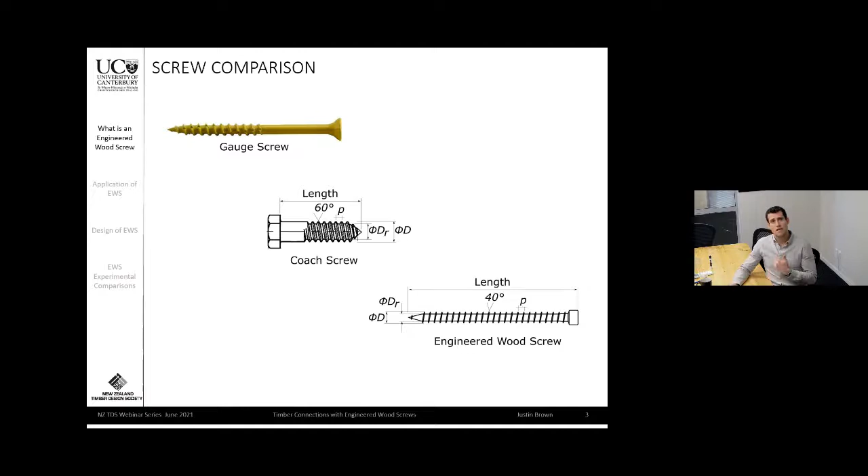All of these screws have common terminology, and that's what I'd like to start with so we all understand certain components as I go through the presentation today. First of all, starting at the top, we have the screw head, which is where we attach the driver to turn the screw into the timber.

If we look at this partially threaded screw, we have the screw shank, which is the smooth section of the screw. Followed by that shank, we have the shank cutter, which is specifically designed to drill a hole slightly larger than the shank and help reduce the installation torques required to drive these long screws into timber members.

Both screws, fully threaded or partially threaded, will have its core or root diameter, shown as D subscript R in this image on the right. Followed by that, we have the threads of the screw, which is generally how we define the size of the screw as the outer diameter D.

The distance between the screw threads is called the pitch. And then finally, at the bottom of the screw, we have the self-tapping tip, which is why these products are also referred to as self-tapping screws.

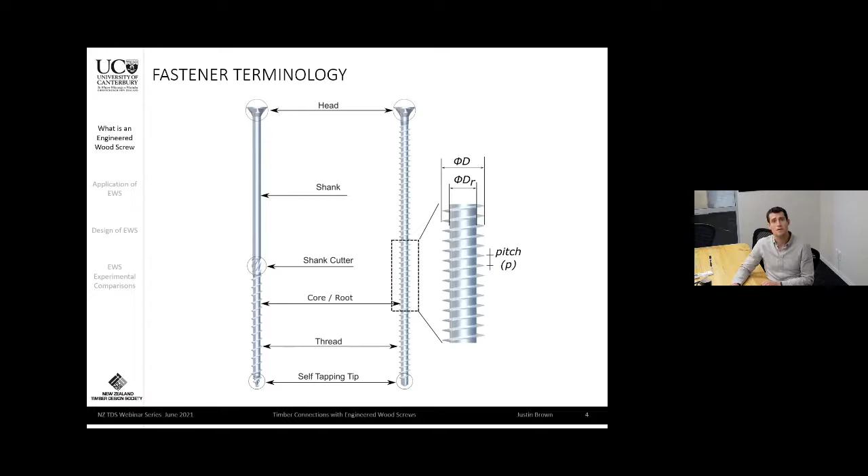These terms I'll use throughout the presentation today. First, gauge screws - these are the screws found in our 3603 design standard, generally referred to as size from 4G to 14 gauge in size. These are 2.7 millimeters in diameter to 6.3 millimeters in diameter.

They come in a variety of forms that can be used for different applications, such as decking screws, for example. They also have many different coatings on them to allow for application in different environments. Some screws also have a T17 tip, which refers to the cutting tip to allow for further ease of installation.

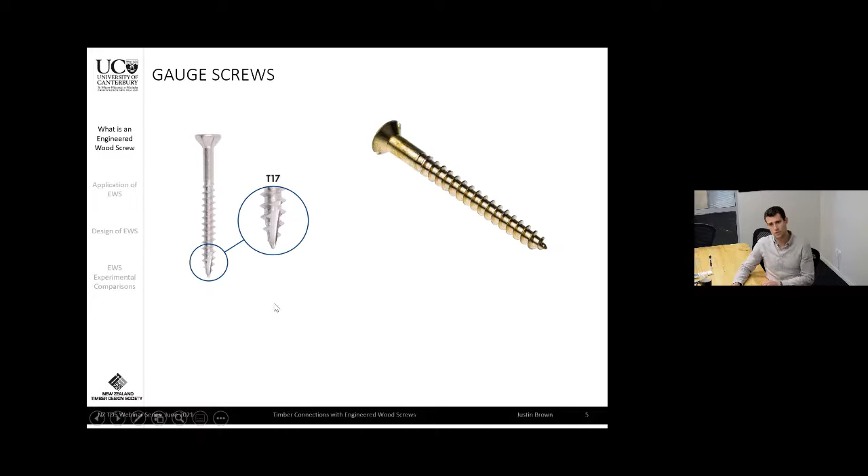For the next few minutes, I'd like to compare a coach screw to an engineered wood screw, going through all the different components of a screw that I just mentioned. Starting at the top, we have the head. A coach screw is generally a hexagonal head, whereas an engineered wood screw has many different head types, which gives you some flexibility in design.

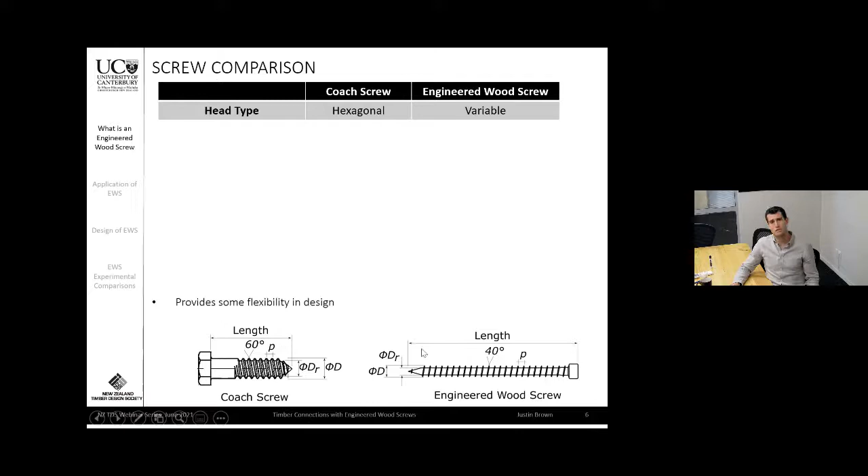The outer diameter of coach screws is in the range of 6 to 20 millimeters, whereas an engineered wood screw is smaller, in the range of 2.5 to 14 millimeters. So there is a difference in size in this.

The root diameter of a coach screw is slightly larger as a ratio of the outer diameter than an engineered wood screw. This means that an engineered wood screw has more thread area in contact with the timber, which helps with its withdrawal capacity, which I will discuss next.

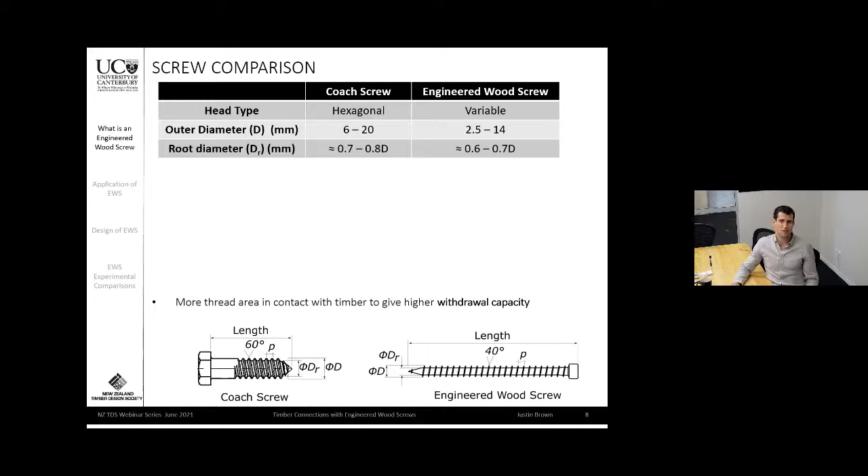The screw length is up to approximately 200 millimeters for coach screws, whereas an engineered wood screw can have a length up to 1.5 meters - very long compared to a coach screw, which allows you to connect much larger engineered timber members together.

The thread length of a coach screw, depending on the size, will become partially threaded and usually 60% of the length. Whereas for an engineered wood screw, as I showed in the previous image, it can be partially or fully threaded, which is also used for different applications.

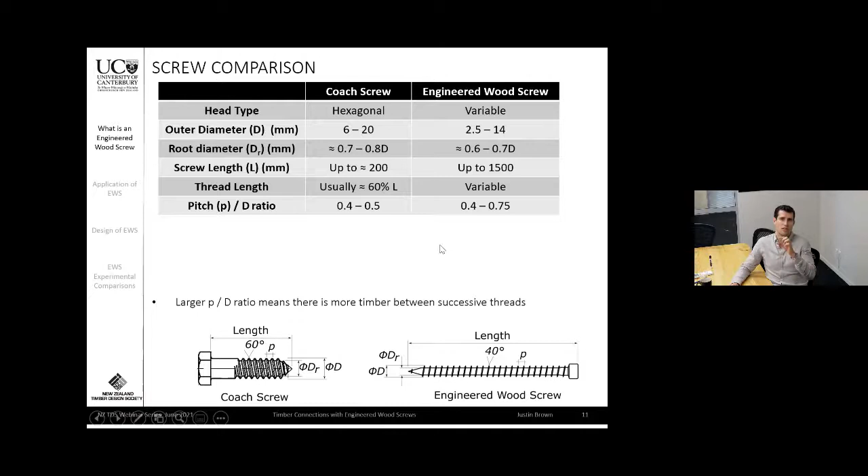When we look at the pitch to diameter ratio, this is slightly larger for an engineered wood screw, meaning there is more timber between each thread, which again helps with the overall withdrawal capacity. On that similar note, the thread angle is much steeper on an engineered wood screw, generally 40 degrees, meaning there will be less local timber damage on installation, again helping with the capacity.

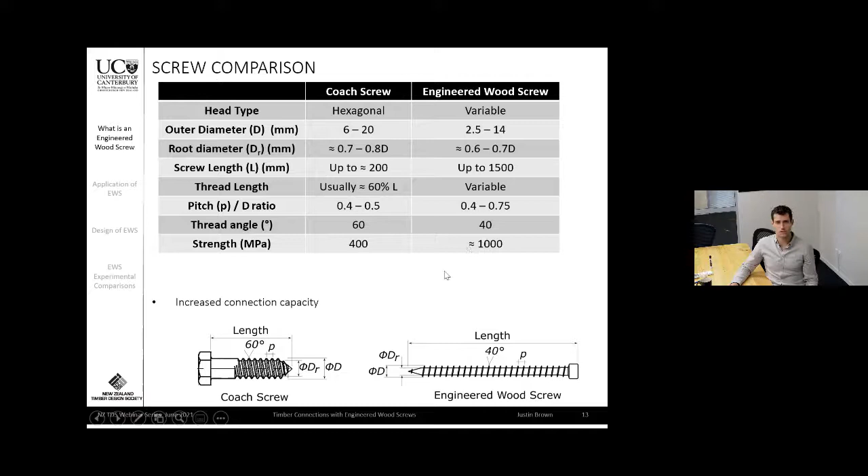And finally, the strength of these screws. Coach screws are generally around 400 MPa, whereas an engineered screw is around 1000 MPa. So a significantly higher steel strength is used in these engineered wood screws, which gives them increased connection capacity.

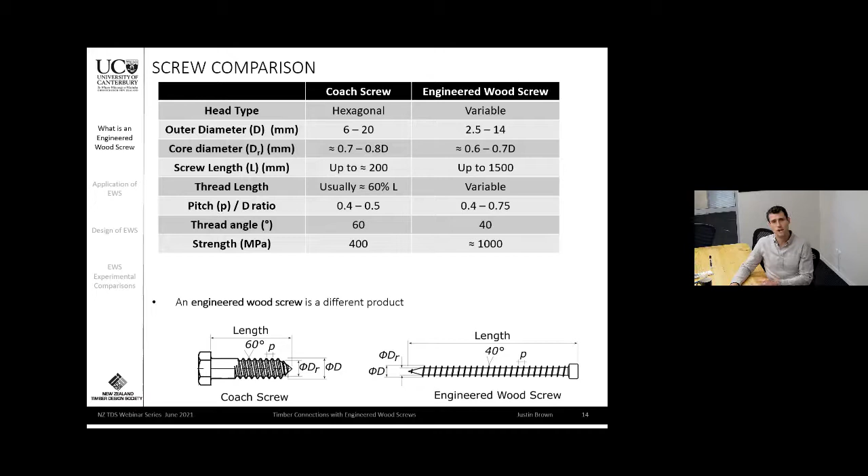In summary, when we compare an engineered wood screw to a coach screw or to a gauge screw, they really are a different product. Gauge screws and coach screws can be used and have a strong application in many of our timber buildings. What I want to focus on today is where we can look at using engineered wood screws, where they are a different product and can provide different advantages.

Here is a visual comparison of what I just described, a coach screw to an engineered wood screw, where you can see looking at the head, to the shank cutter, which will be there for partially threaded engineered wood screws, to the thread, and finally the screw tip. They are really a different product, specifically engineered for different reasons.

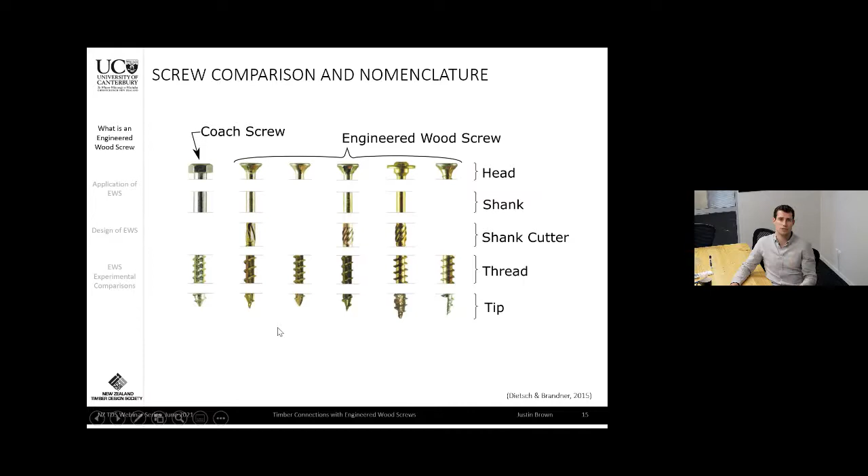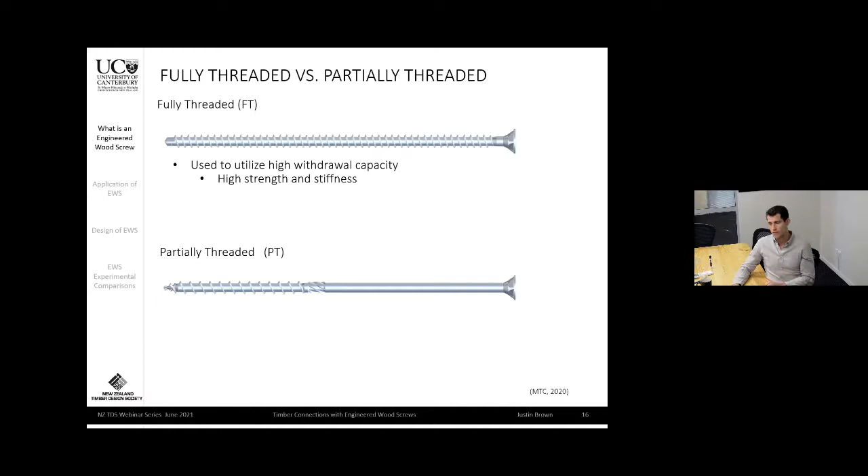Now focusing on engineered wood screws, which I will do for the remainder of this presentation. As I previously mentioned, they can be broadly placed into two categories, fully threaded or partially threaded. Fully threaded screws are used to generate the withdrawal capacity along the axis of the screw, and these can also provide a very high strength and stiff connection.

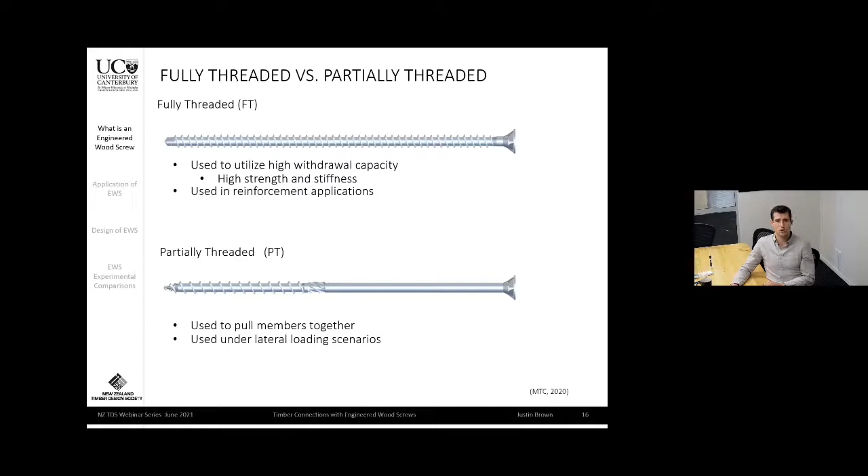They're also used in reinforcement applications very commonly. A partially threaded screw, on the other hand, is generally used to pull members together, and they're used in scenarios where the screw is under lateral loading and not under axial loading.

Focusing on the screw head types, there are many screw head types. I'll just focus on the three main ones that you'll find with engineered wood screws. We have countersunk head, which can provide a flush surface finish to either steel or wood, and these are used in steel to wood or wood to wood connections. We also have a washer head screw, which is used to provide a high clamping action. The head of the screw is really like a large washer that can then clamp two pieces of steel to wood or wood to wood together. So the washer head screw head diameter is significantly larger than a countersunk head screw.

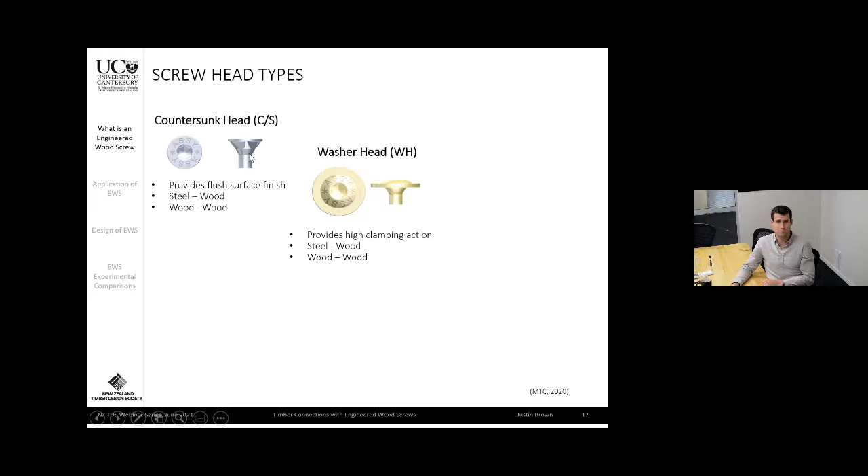The smallest screw head diameter that you will be able to get is a cylinder head screw. These are specifically made as small as possible to just fit the driver that you will use to turn it into the wood, so that we can actually bury the head of the screw into the wood. These types of screw heads are used in applications for wood-to-wood connections.

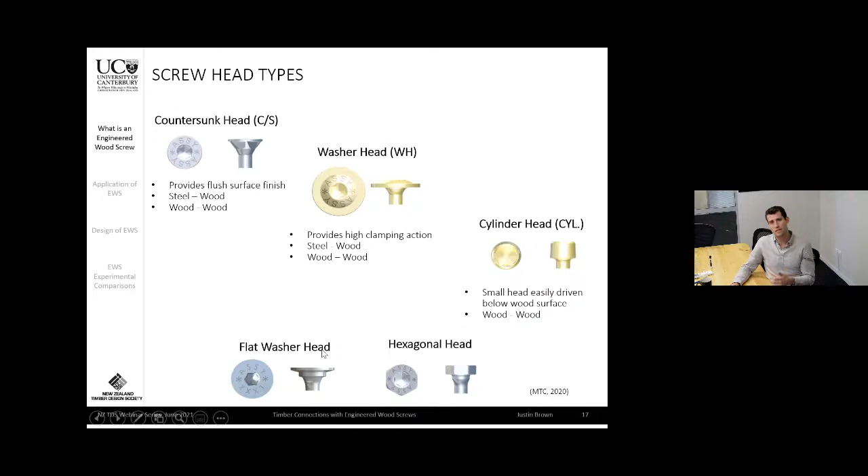As I previously mentioned, there really are many different screw head types that are now becoming available. Different suppliers have their own unique head finishes to help provide different architectural looks as desired.

Looking at the bottom of the screw, there are also many different screw tip types that you'll find if you're looking at different suppliers. They're all generally done to provide ease of installation. They also are meant to provide a self-tapping function, to say that they do not require pre-drilling. However, in New Zealand species, which are generally our radiata pine or Douglas fir, of much higher density than, let's say, European softwoods, self-tapping may not always work and pre-drilling may be required. I'll speak about this a little bit later in the presentation.

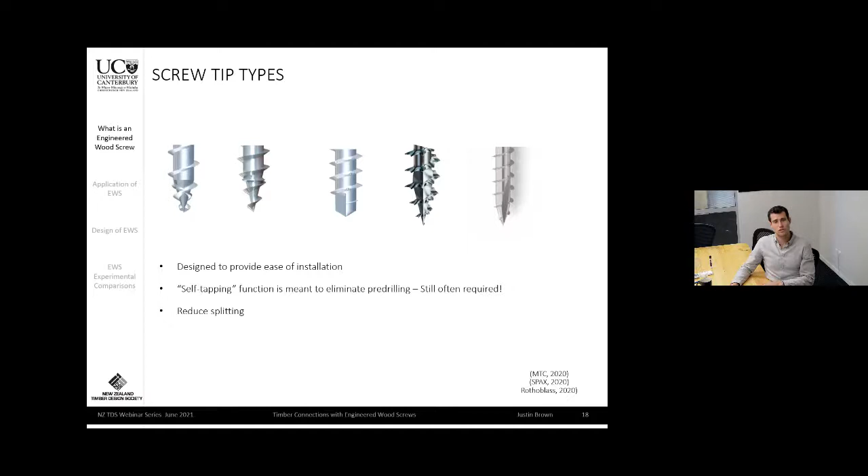The tip is also designed to reduce splitting on insertion into the timber, and it's also designed to reduce the installation torques. You can imagine some of these engineered wood screws are up to 1.5 meters long. That frictional area becomes quite large as it's going into the timber, which can make it quite difficult to actually drive in. The tip can also influence the withdrawal capacity of a fastener, and for this I recommend you look at the specific supplier documents, which I will get into that later on in the design.

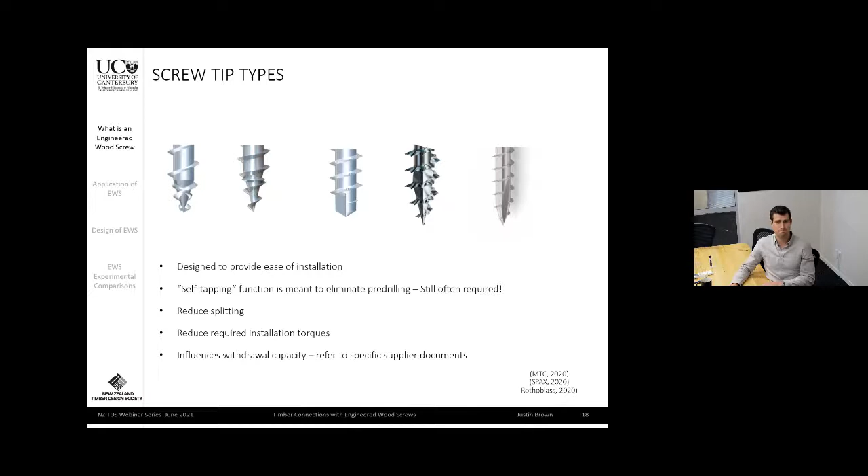So now I'd like to spend a few minutes just to give you a general overview of how we can apply these screws in typical connections in a timber building. First of all, as a reinforcing element, this is a very common way to use engineered wood screws. This was also our first webinar series given by Daniel Moroder, so I'll just quickly overview this section.

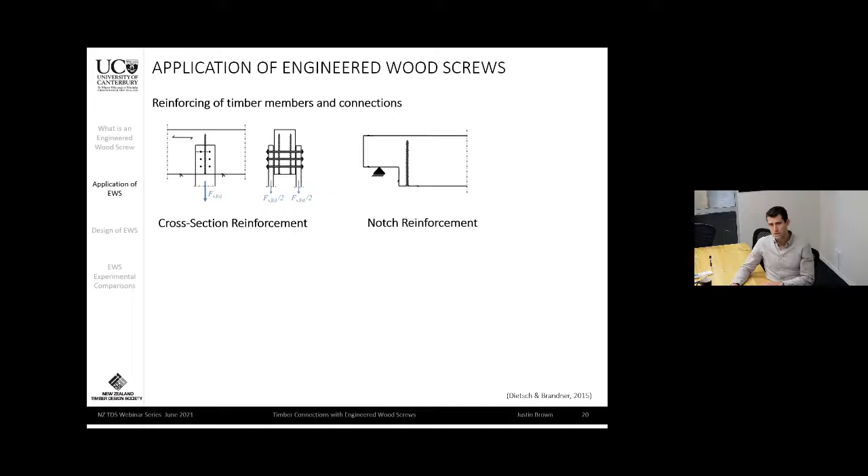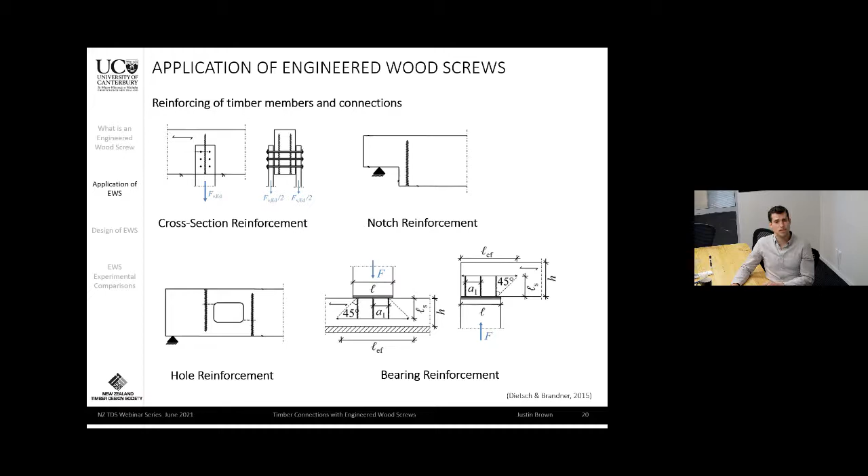Engineered wood screws can be used to provide cross-section reinforcement to prevent tension perpendicular to grain splitting. They can provide notch reinforcement, as shown here, hole reinforcement, and also bearing reinforcement. In all of these applications, you can see that we are using a fully threaded screw and even most generally a cylinder head. They can also reinforce connections to prevent splitting along a dowel group line, and they can also provide shear reinforcement to actually increase the net shear capacity of a section.

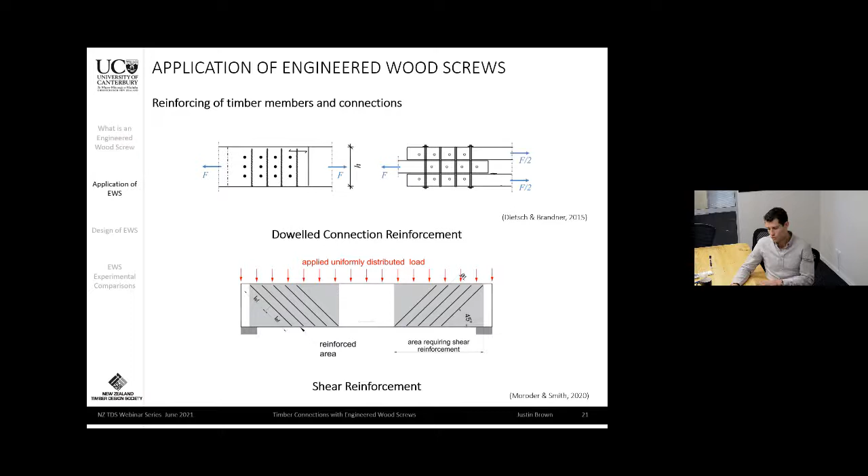For more information on this topic, I'd recommend that you look at the NZ Wood Design Guide that has been recently published, authored by Daniel Moroder and Tobias Smith at PTL Structural Consultants. You can also refer to our first webinar, as I previously mentioned.

Now, how can we use these engineered wood screws in connections?

Floor-to-floor details are a very common way to employ these screws. Before I get into more of these images, I'd like to mention that the arrows indicate the direction of loading. If we look at X's, crosshairs, and dots, those represent load into and out of the page, and our arrows represent loads across the page.

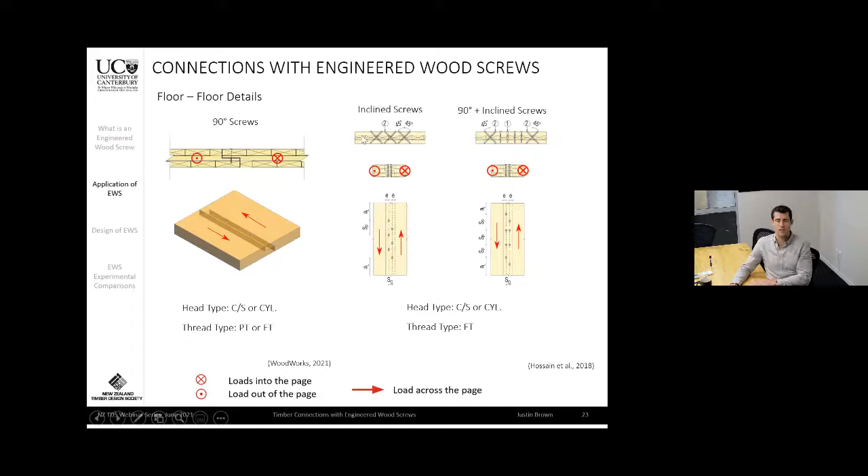A common methodology is to install screws at 90 degrees at a lap joint, here shown with CLT, to provide an efficient shear transfer method. However, we could also use incline screws for this same connection, which can provide increased strength and stiffness where desired. We may also combine 90-degree screws and incline screws for the exact same joint, to provide increased displacement capacity, especially under seismic loading.

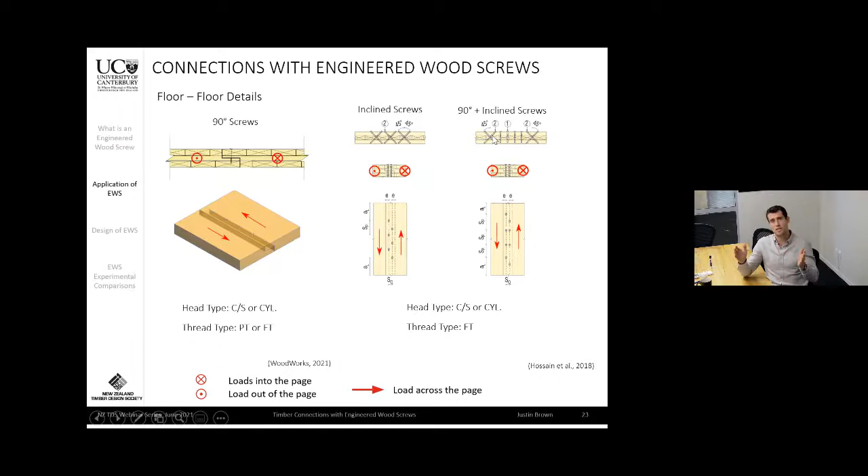We may use these screws in floor-to-beam details to provide shear transfer into and out of the page, or in a wind uplift scenario where we need to clamp the panel to the beam below. If we are looking to clamp those together, we might use a washer head screw to support the CLT, with the threads inserted into the glulam beam below.

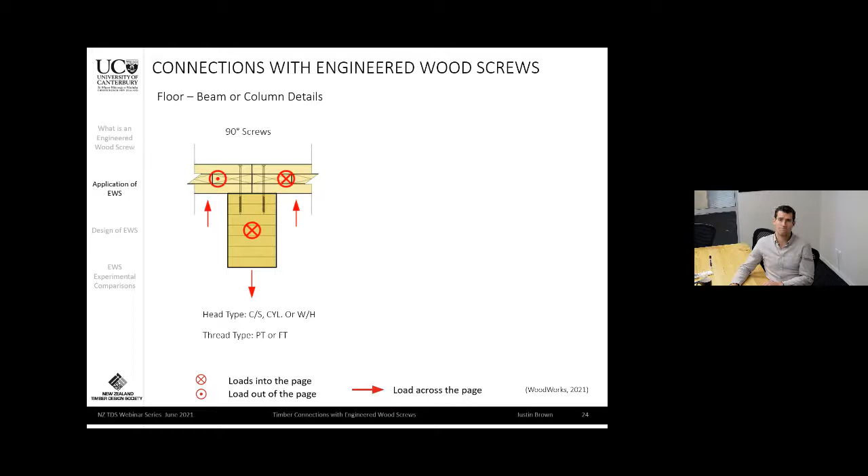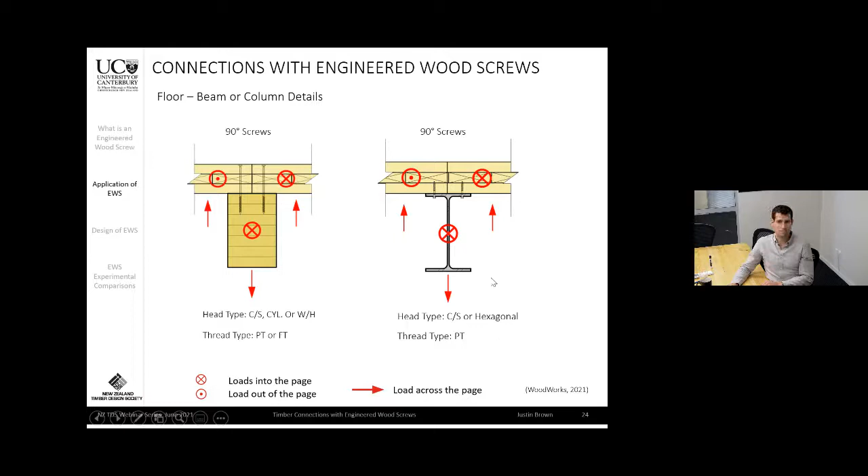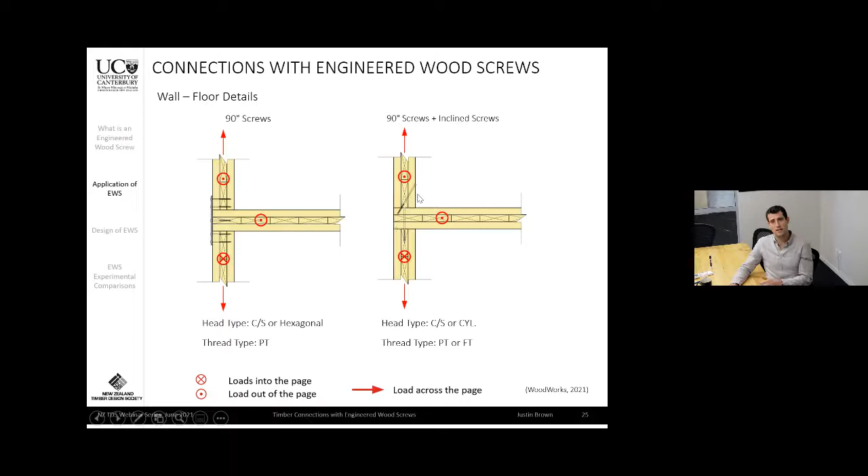We may not want that steel plate on the end, and if that's the case, we could also use incline screws to achieve the same connection and resolve this detail in a different manner. In this case, we may use partially threaded or fully threaded screws to provide a sufficient connection from the wall to the floor below.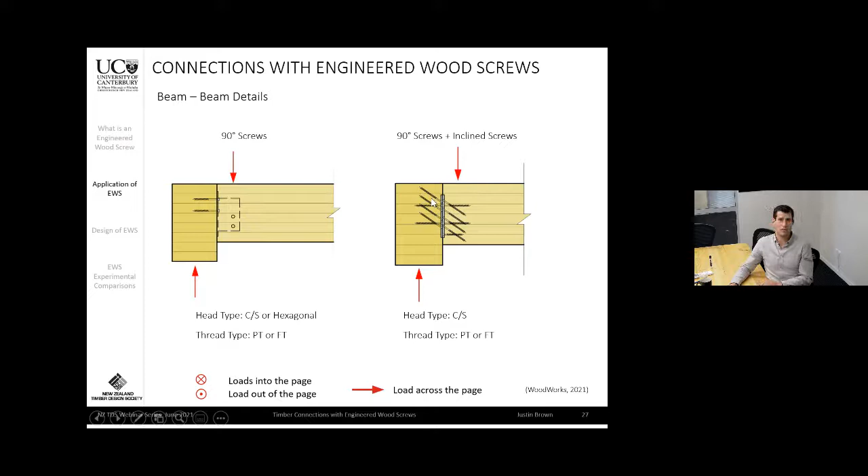I hope that gave you a quick snapshot of where you could use these screws on your next timber project. Now I'd like to actually discuss how we could design those screws.

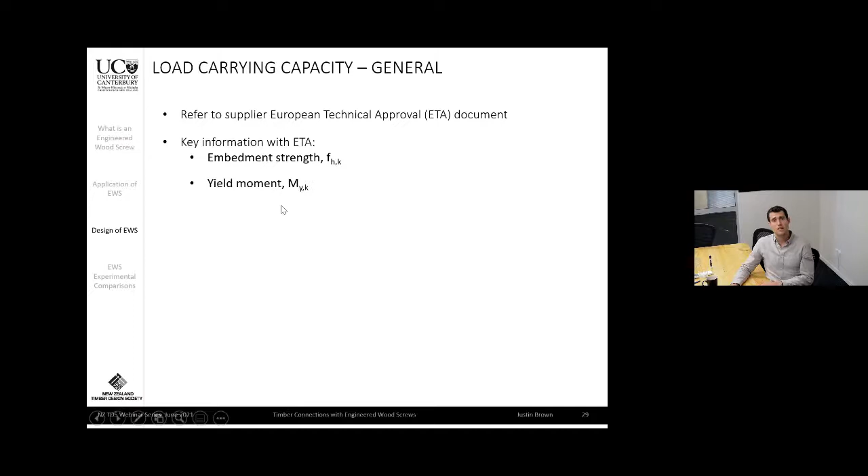To design these screws, currently they are not listed in the NZS 3603, so at the moment you will be required to refer to the specific supplier's European Technical Approval document. These documents are available through supplier websites, freely available, and contain lots of information on the design of their product. Within the ETA, you will find the embedment strength, the yield moment, the withdrawal parameter, the head pull-through parameter, and the tensile capacity of the screw.

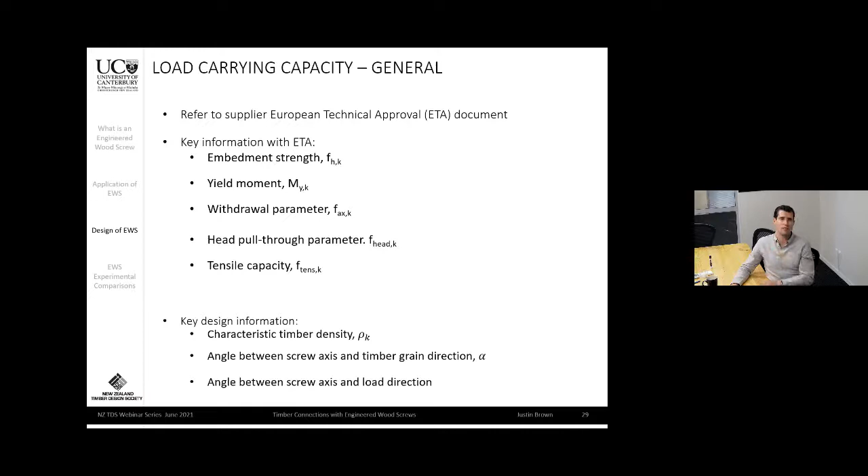As a designer, you will have to understand the timber density you are dealing with. For radiata pine in New Zealand, that can often be 440 kilograms per cubic meter. We also need to understand the angle between the screw axis and the timber grain direction, and the angle between the screw axis and the direction of the load. Now I'll take a minute to describe these five key components found in the European Technical Approval.

First, the embedment strength. Embedment strength is really a bearing pressure of the screw, or a dowel, as a reaction force against the timber. This bearing pressure acts perpendicular to the axis of the screw.

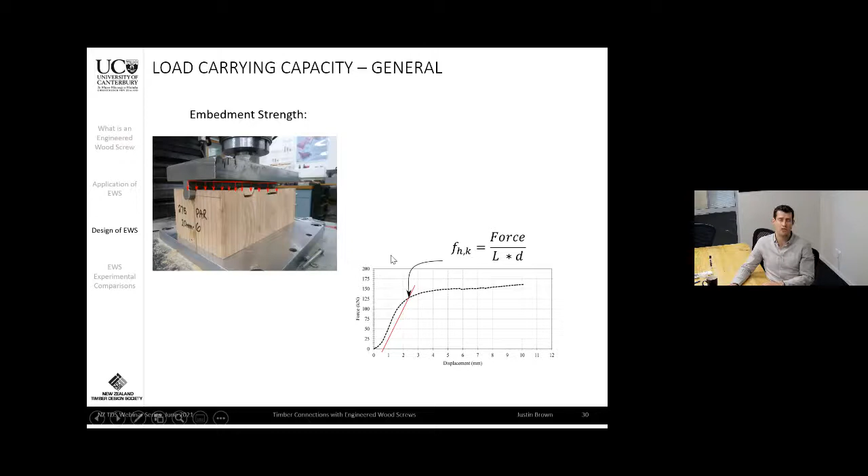In this photo, I'm showing some testing we did at the university with a smooth dowel being pushed into a CLT piece of wood. Here we can see the representative load displacement curve, and embedment strength is determined by offsetting the elastic portion of the curve with this red line and determining the point of intersection. We then take that force and divide it by the length of the screw and the diameter of the screw, which gives you your embedment strength, a property for design.

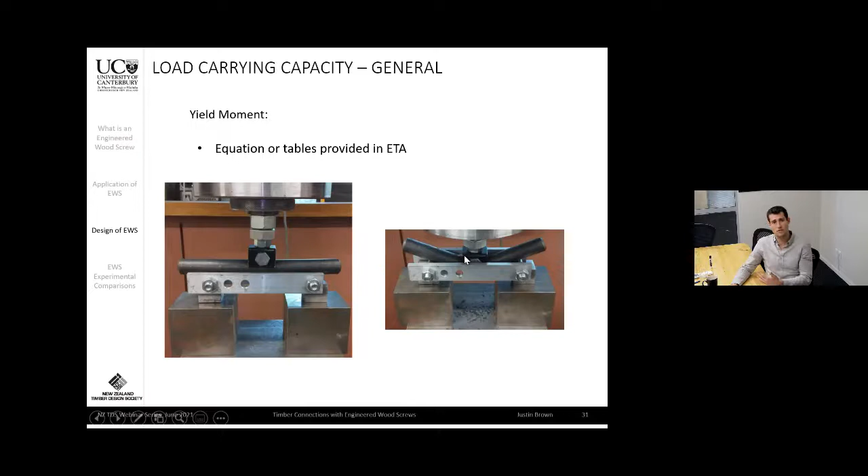The next value is the yield moment. That is generally given as an equation or tabular value in the ETA. Here I again show some testing from the university where we are determining the yield moment of a smooth dowel. So it's literally a function of the steel property, which gives us this yield moment.

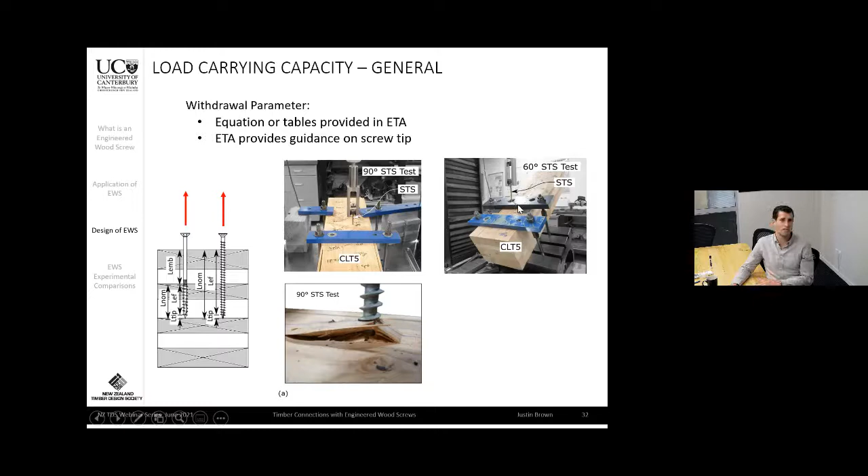In these photos on the right, I show some of our experimental testing in the lab, where you can see we pulled screws out of this CLT member installed at 90 degrees to the timber grain. Here you can see the associated failure mode at the timber surface, which is timber splitting. We also installed these screws at 60 degrees to the timber axis, which would have a different associated withdrawal capacity, and finally we installed them parallel to the timber fibers.

Here you can see there's a distinctly different failure mode between this 90-degree test and this parallel to the grain test. This is actually a local conical shear failure, as the timber fibers around the area of the screw thread are actually pulled out of the timber member.

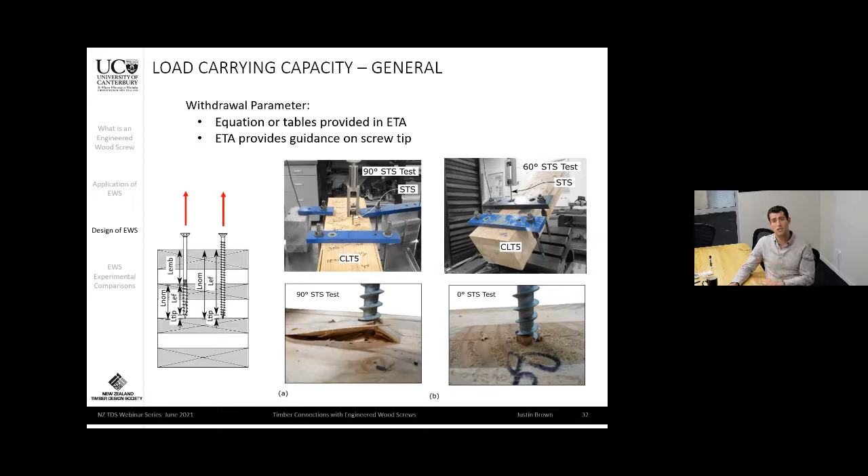Currently, design standards may not allow screws to be installed parallel to the grain, and ETAs provide specific guidance on this if it is allowed. I will say it should be approached with caution, as there are long-term duration effects and moisture considerations, which lead to these conservative strength reduction factors for the screws installed at this angle.

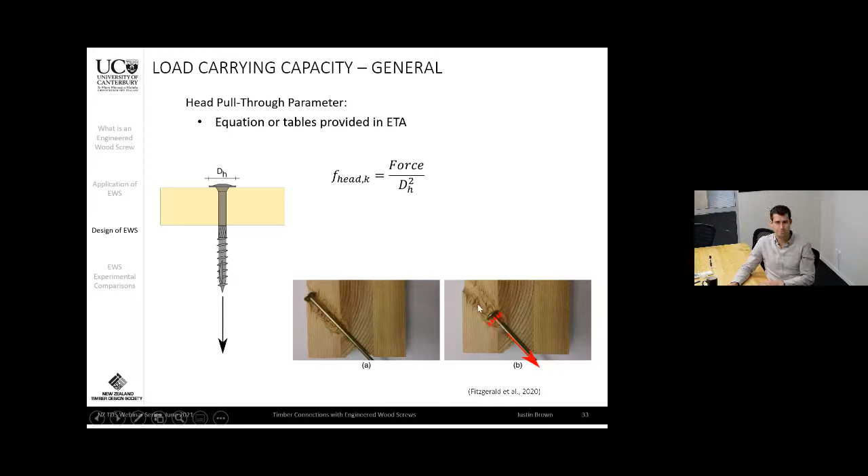Another parameter is the head pull-through parameter. This is generally used in the case of washer head screws, and it's really a function of the surface area underneath the head of the screw. Here in the bottom, I show a photo from work by Fitzgerald et al., where you can see this bearing pressure being developed underneath the surface area of the washer head screw as it's being pulled through the member. So that will generally be a tabular value in your ETA as well.

The final value that you'll look for in the ETA is the tensile capacity of the screw. Here's a testing photo from the lab again, where you can see part of the screw has stayed in the timber. It has snapped right at the surface, and here's the other end shown here in the person's hand. This tensile capacity is generally a tabular value given in the ETA, and it's usually compared against the withdrawal capacity in your design. This will be something I'll discuss more in the upcoming slides.

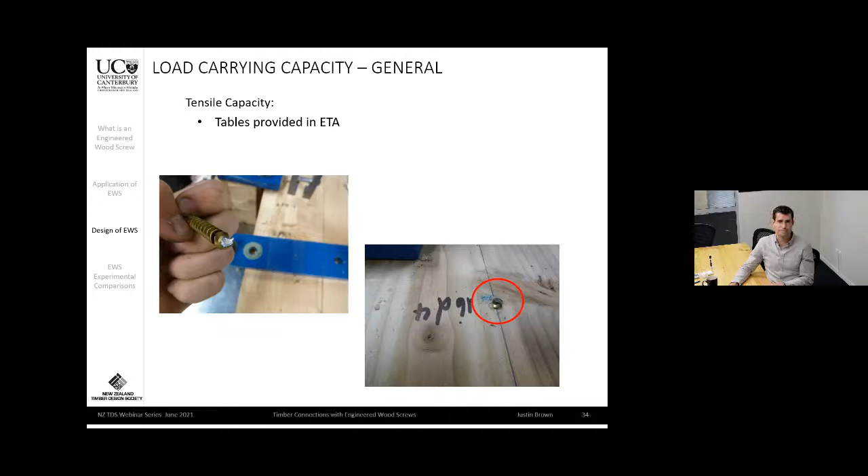Now that we understand the key parameters required for engineered wood screws, I'll look at how we can determine their load carrying capacity, first in shear when they're laterally loaded, and then second when they're loaded in withdrawal.

When we have a screw loaded in shear, there's a certain set of equations we refer to from the ETA to determine the capacity of the connection. Those equations are referred to as the European yield model, or the Johansen equations. I won't get into each equation in significant detail, because this will be a future webinar series from the TDS, so please stay tuned to learn more about this topic. It will be an important presentation in the coming months.

What I will say is that the failure modes are a function primarily of the embedment failure, as I described before, and the yield moment of the fastener. It's also a function of the thickness of the two members that you are connecting together.

Looking at these images, starting at A, we can see that in A and B we are looking at embedment failure, either in member 1 or member 2. The photos here are showing the failed shape of the connection.

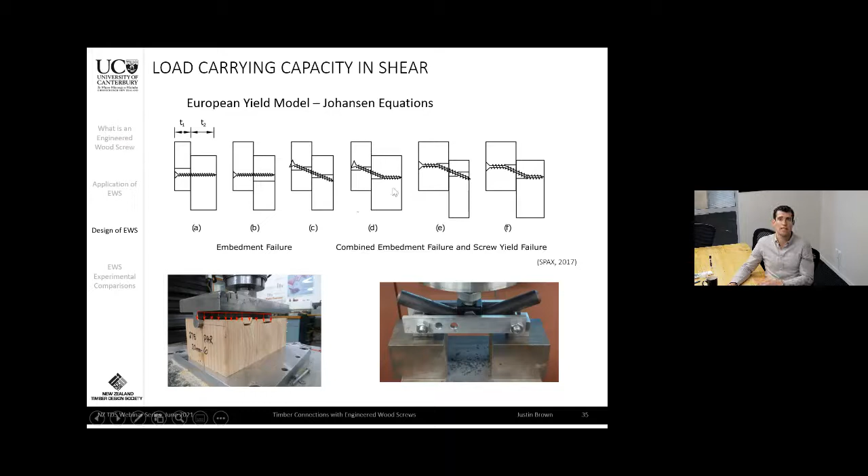That is what these equations allow you to do: determine which failure mode is likely to occur in your connection. We have a set of 6 equations, which I won't get into the details of, but as a designer, we look at the minimum value, and that is then the design strength or load carrying capacity of our connection.

So this portion in blue is really a function of the embedment strength and the yield moment, which I just described in the previous slide. And this section in green is a unique component that we consider for engineered wood screws, which is the rope effect. So now I'll take a moment to describe what the rope effect is.

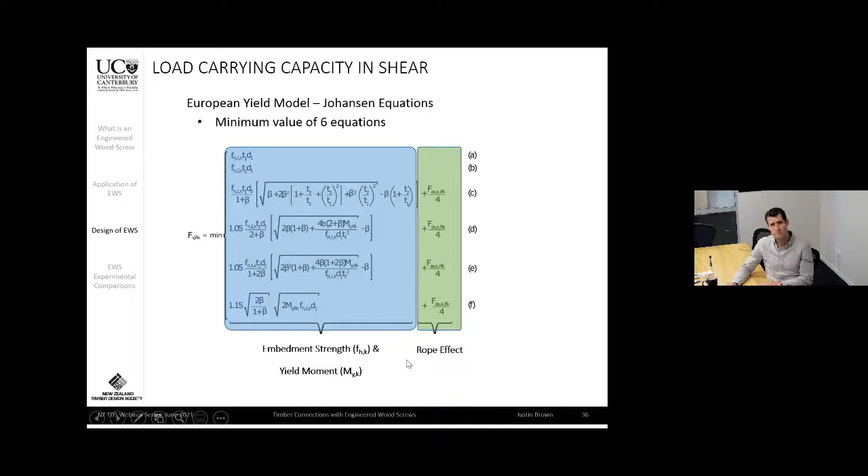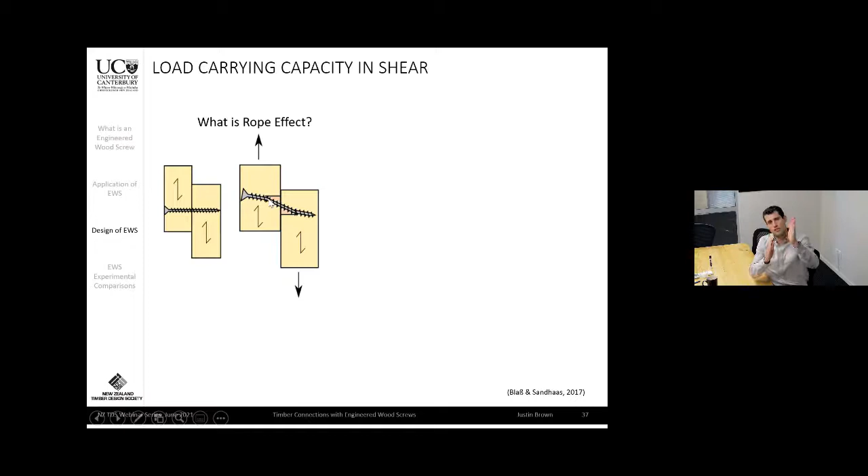If we look at that idealized connection from the previous slides, the rope effect occurs when a connection engages in a small deformation. And as that member is sheared, the screw actually develops a force along its axis, as you can see here in this free body diagram.

That tensile force is developed as the withdrawal capacity of the threads. That tensile force along the angle of the screw can be resolved into a compression component shown in red and a component parallel to the shear plane shown here. That component shown in red is perpendicular to the shear plane and tends to clamp these two members together. That effect is quite significant, and that is what we actually call the rope effect.

From a designer's point of view, we can basically increase the capacity of a shear connection to consider not only the embedment and the yield moment of the fastener, but also the withdrawal capacity, because it is clamping the members together. So that rope effect is usually determined as the minimum of the withdrawal capacity divided by 4, or the shear capacity. This is an important parameter and can effectively double your load carrying capacity in shear if it is present.

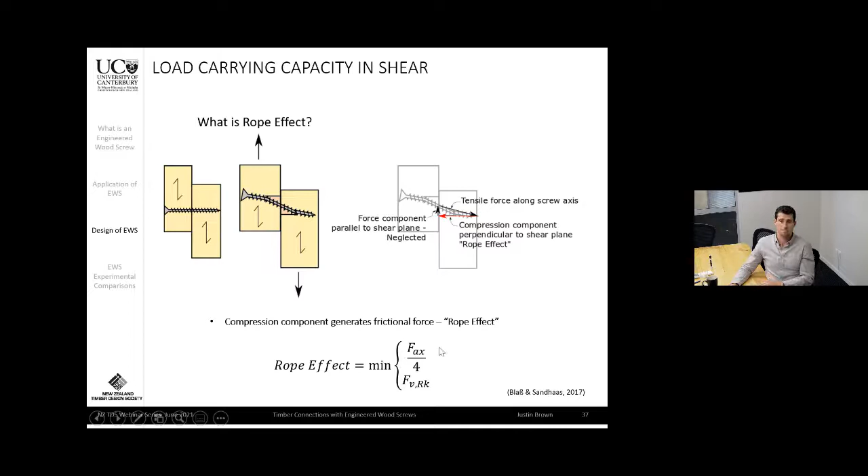Now, looking at the design of engineered wood screws as they're loaded in withdrawal. This is a larger image from our previous slides, where I show the idealized case where a screw is loaded along its axis and pulled out of the timber member in a pure withdrawal scenario.

In this case, to determine the design strength of this connection with a screw, we would choose the minimum of the withdrawal strength, which is a function of the thread, or the tensile strength, which is a function of the steel capacity. The withdrawal strength will be determined by reading that withdrawal parameter from the European technical approval, multiplying it by the diameter of the screw, the effective insertion length, divided by an angle adjustment. And that equation for the angle adjustment will be unique to the ETA as well.

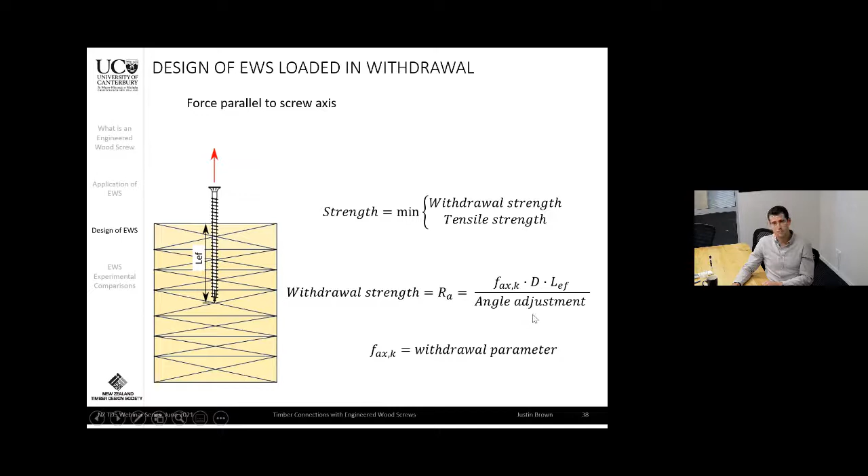However, in most cases, these screws are not perfectly aligned to the direction of the applied load. By that, I mean there is an angle between the screw axis and the direction of the load, which I show here as phi.

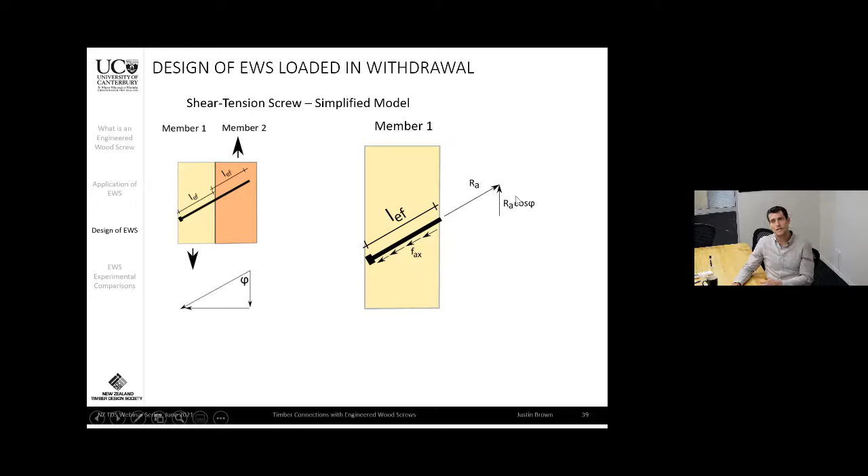So in order to design these screws loaded in withdrawal, the simplified model we look at is to consider that withdrawal parameter developing along the effective length of the member, which creates a withdrawal capacity RA. That withdrawal capacity, which is along the axis of the screw, can be resolved to a component parallel to the direction of the applied load. That is how we determine the withdrawal or shear capacity of this screw.

The screws connect two members on both sides, and so to determine the connection capacity, we look at the minimum of member 1 or member 2.

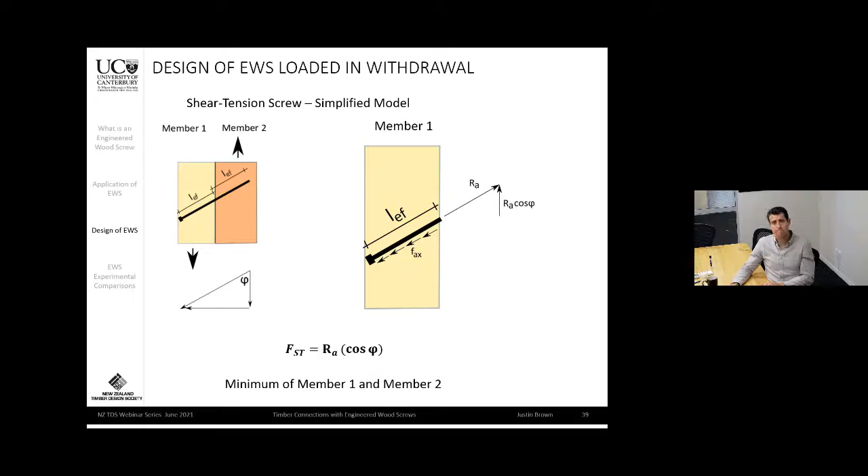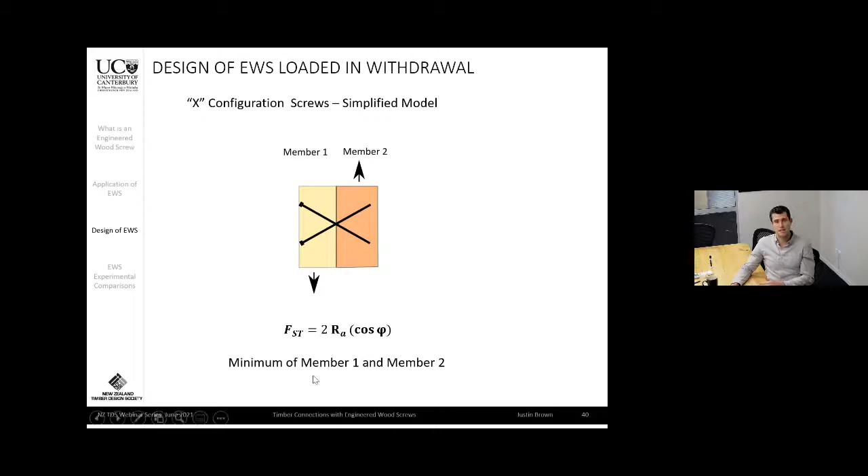If we have screws installed in a cross configuration, which may occur especially under load reversal during seismic loading, the simplified approach would be to just multiply that capacity by 2, again considering that we choose the minimum of member 1 or member 2, which will be determined based on the effective length of the thread on each side.

However, I say this is the simplified model because it doesn't fully capture what is actually occurring at the connection. So now I'll take a moment to describe what is actually happening and show you what a more detailed model of withdrawal capacity might be for an inclined screw.

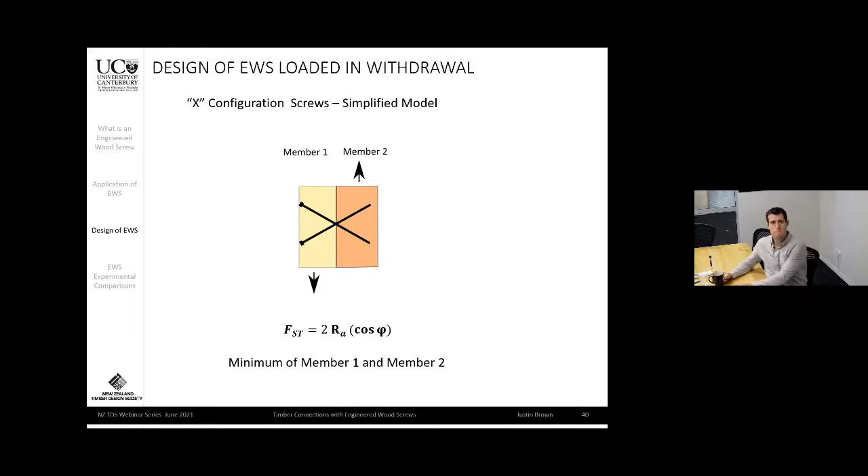If we look at member 1 again, in reality, because that screw is not perfectly aligned with the applied shear force, the screw axis is not aligned with the applied shear force shown here, there is actually a combination of embedment stresses and withdrawal stresses occurring on that screw.

And I already described how that withdrawal parameter can be resolved to a withdrawal capacity, RA. But this embedment force is also occurring perpendicular to the screw axis, and that can be resolved into a force RV.

So the detailed approach of designing these connections would say that there is actually a withdrawal component and a shear component contributing to the connection strength. We can resolve that RA into its force component aligned with the force, as I had shown here.

But then there is also this shear component we should consider, which would be the sine of the angle. There is also this mu included in this term, which accounts for the clamping effect I previously described, which is the rope effect.

So as with the previous model, ultimately we need to determine the capacity of member 1 and member 2, and the minimum value will be what governs your connection.

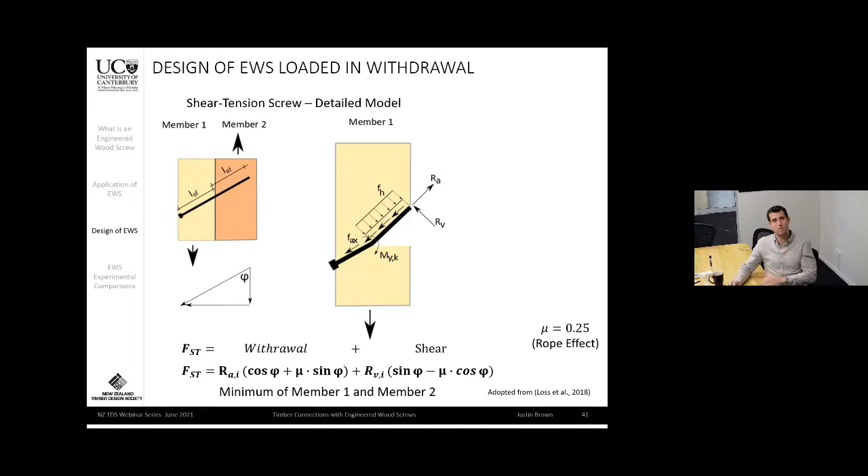Because this screw is loaded in a shear tension manner, we call this a shear tension screw. If it is loaded in the other direction, we would call it a shear compression screw. If you can see, I've rotated it to be aligned differently between member 1 and member 2.

In this case, if we examine it in more detail, we would actually find that there is a zero stress area at the interface between member 1 and member 2. That zero stress area has a physical meaning in that because the screw is installed in the opposite direction, there is a prying effect actually occurring at the interface of the joint.

That prying effect provides a tendency to split the timber, and therefore we take a certain length, x1, as a zero stress area. It has no contribution to the withdrawal strength or the embedment strength.

To define that length, we have this equation here, which has been provided recently by Jockwer et al., and is used in our more detailed models that I'm describing now.

So in this case, we do not have a friction term because, again, instead of clamping the members together, the force components shown here tend to split the member apart. Again, as with the other models I have shown, we always choose the minimum of member 1 or member 2.

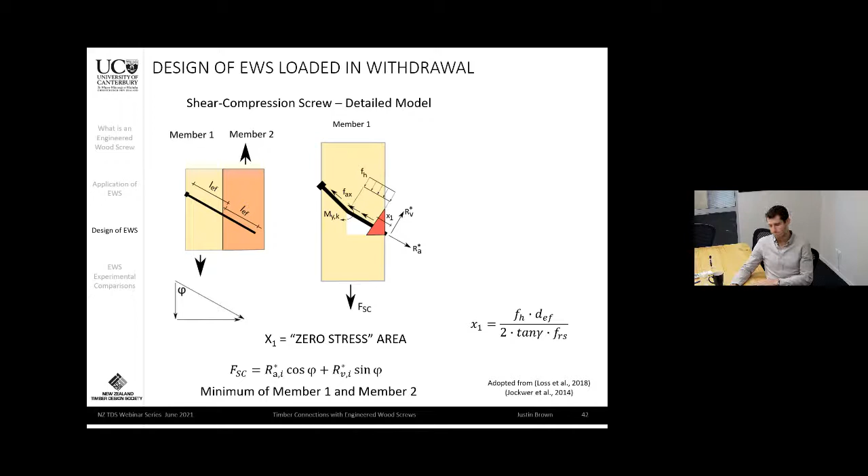So if we are to design an X configuration or cross configuration of these screws, the detailed approach, similar to the simplified approach, is to simply add them up: a shear tension screw and a shear compression screw. The equations are simply provided here.

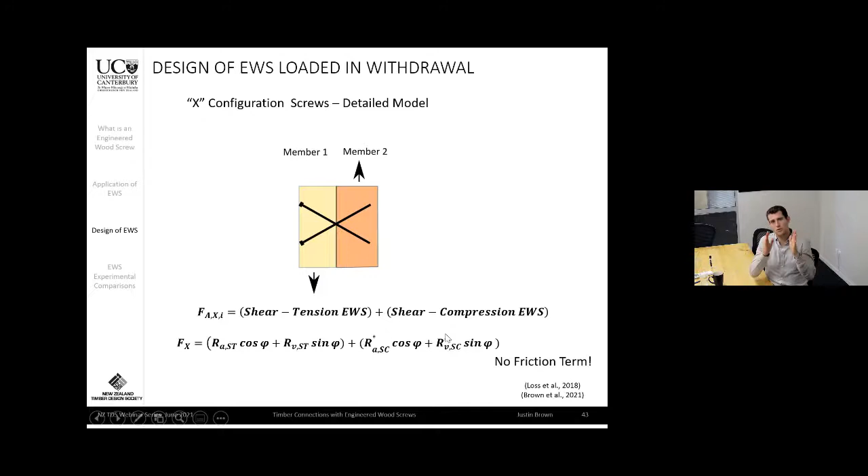And you'll notice that because we have these screws installed in cross configuration, that friction term has gone away. They cancel each other out and we lose that tendency to clamp the two members together.

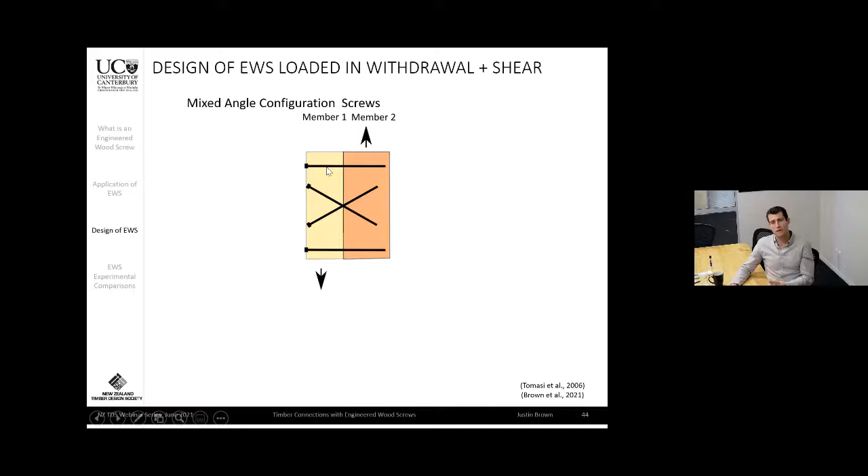If we decide to install a combination of cross configuration screws and screws installed at 90 degrees, the method we've proposed in recent work is simply to add them all up. So we would have a shear tension screw, a shear compression screw, and just a shear screw, which is your 90-degree screw. This is more of a simplified approach, but has been shown to provide sufficient accuracy at this time.

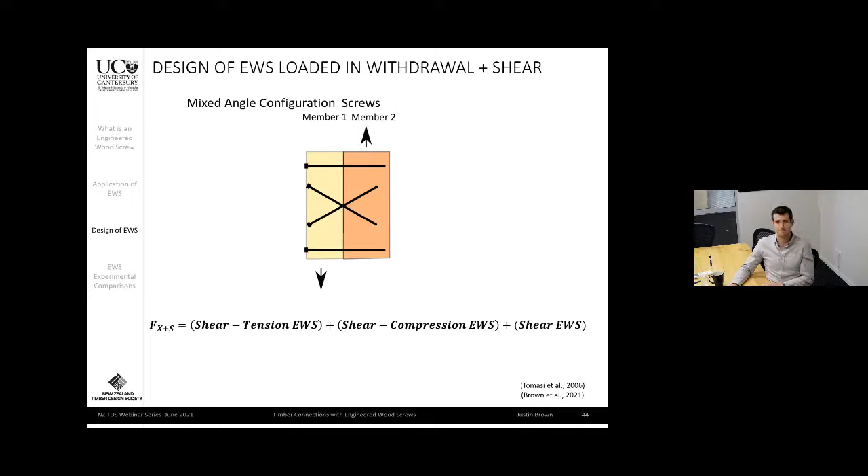So some final considerations for the design of these screws. I've now reviewed how we can design a screw under lateral loads using the European yield model and under withdrawal scenarios where we have to consider the actual withdrawal strength of the screw.

My first recommendation is to look at the European technical approval of the screw supplier you have chosen. There are some differences between screw suppliers; however, they may be small. It is important that we understand where they may be coming from, which could be due to different screw tips, root diameter to outer diameter ratios, etc.

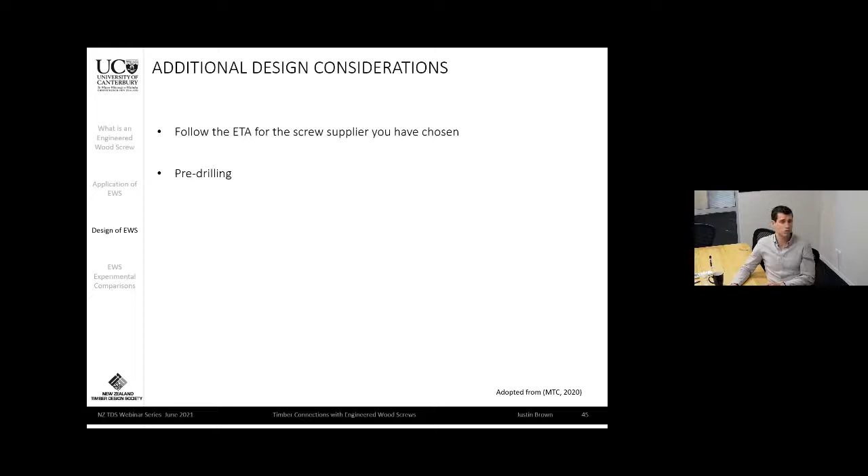I think in New Zealand, pre-drilling is quite commonly required, especially when we look at screws 8mm diameter or larger, and especially of lengths greater than 200 millimeters. This helps reduce the splitting tendency of wood and can also reduce the spacing between the screws, which I will describe in a moment.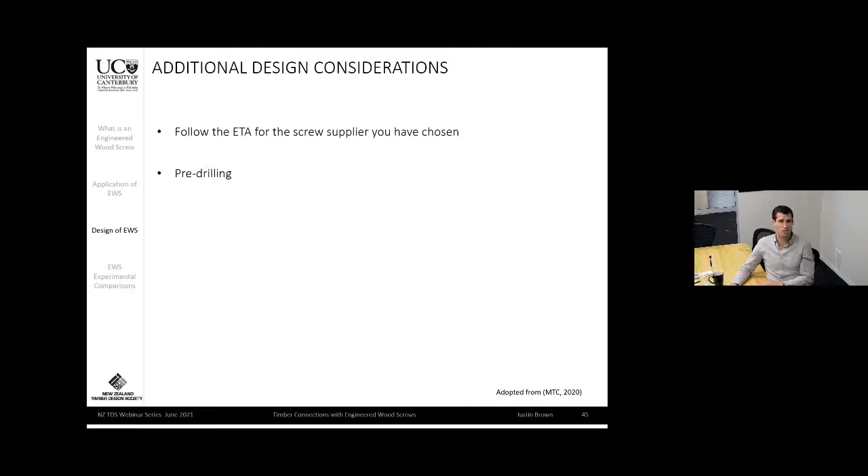Something I haven't discussed yet is how we actually install a group of these screws. Everything I've discussed previously has just been around one screw or a short group, but in all of our ETAs and design standards, we find a minimum spacing. That minimum spacing between engineered wood screws is dependent on the loading direction, the timber species, whether or not pre-drilling is used, and the type of wood product.

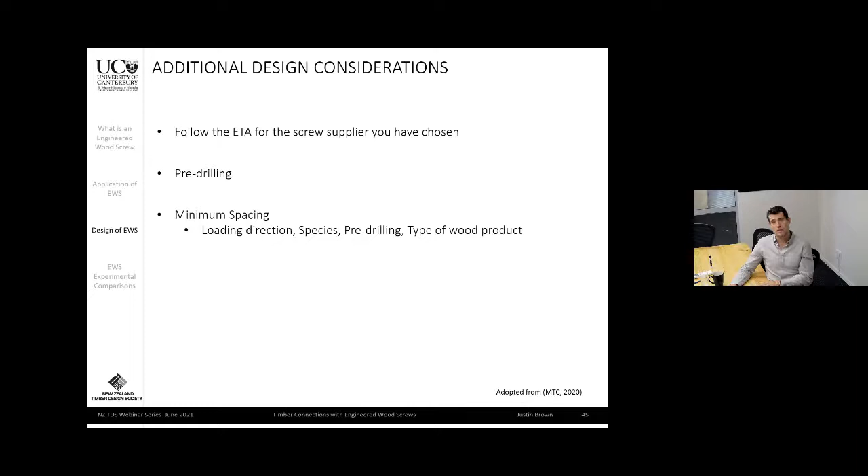These minimum spacing requirements are very important, and the idea is to reduce the likelihood of a premature brittle failure mechanism. The European yield model in particular is derived based on six equations which focus on a non-brittle failure mode. However, we could have tension perpendicular to grain, for example, which is a brittle failure mode, or row shear failure as a group of fasteners, and this minimum spacing is very important to ensure that does not occur.

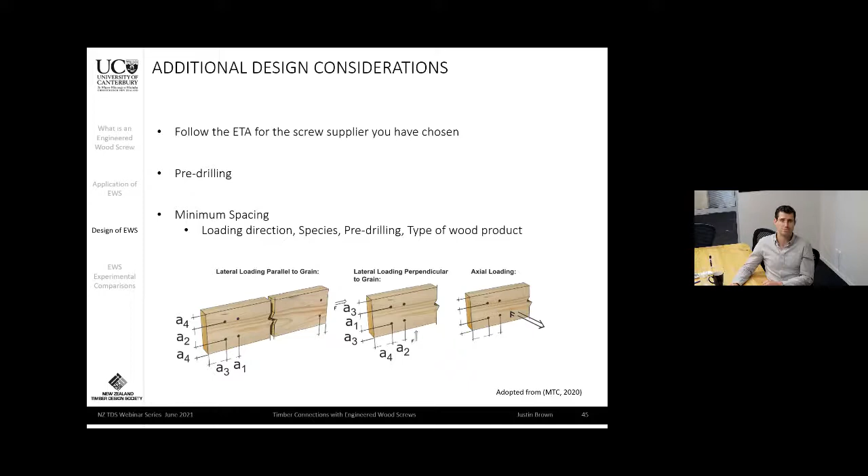Okay, now for the last 5 minutes, I would just like to give some insights from our experimental testing here at the University of Canterbury.

As a designer, you may be looking for certain performance indicators, and I hope through these next slides I can illustrate that the way we install the screw will significantly affect not only the strength, but also the stiffness of the connection, the displacement capacity of the connection, which could be important for cyclic or seismic loading, and the failure mechanism.

On the right side, for the remainder of our slides, I have an image of these six different installation methods that I just described the design of, and I would like to show you some force displacement curves so you can get a feeling for what their differences might be.

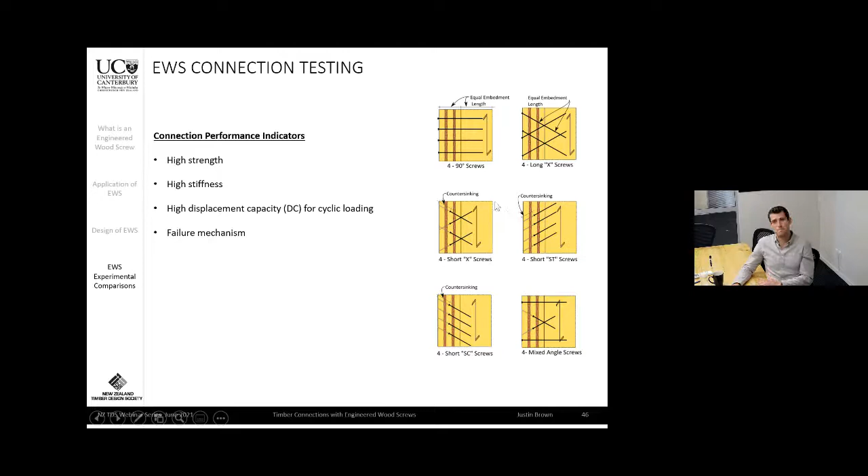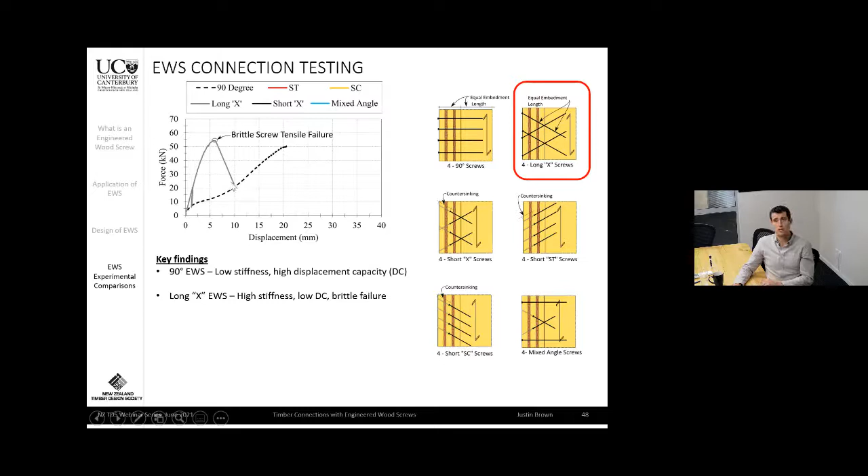To control that failure mechanism, we could reduce the length of the screw, reducing the effective length of thread on each side of the member. By doing this, we get a more gradual failure mechanism, shown here in black, as we see the load dropping off. However, you can also see we have a very similar initial stiffness to that long inclined screw.

If we were to install short shear tension screws, with screws only in shear tension, you can see we could reach our highest strength capacity. They have a very high stiffness, but also a gradual failure mechanism, because the governing withdrawal capacity was screw withdrawal failure, not tensile steel failure. So a very important consideration there.

Next, if we were to install screws in shear compression, this would be very uncommon to do on its own. However, just to illustrate, this would provide much lower strength, a very high displacement capacity, as you can see here, and in fact no failure around a 40 millimeter connection displacement. This shows the difference in load capacity that can happen because of that zero stress area, depending on the installation angle that occurs.

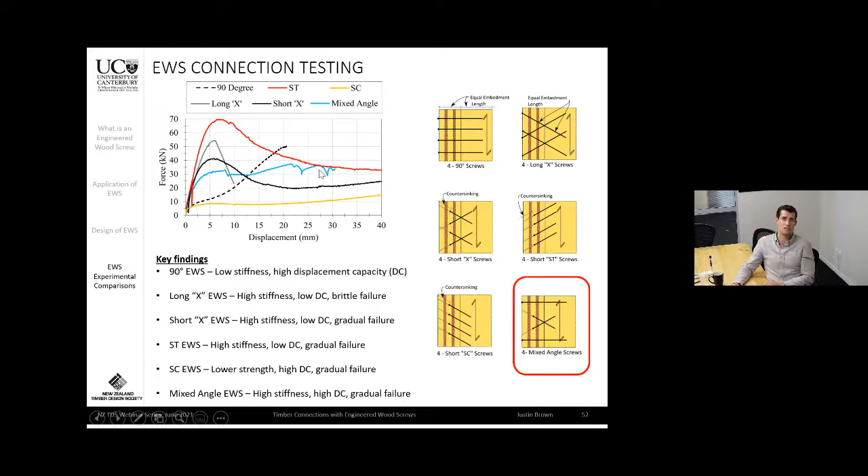Finally, if we install screws in a mixed angle configuration with both 90 and short incline screws, our force displacement curve may look something like this, where we have a nice initial stiffness comparable to our inclined only connections, but we get this more stable post-peak behavior that allows us an increased displacement capacity, which may be required especially in seismic loading scenarios.

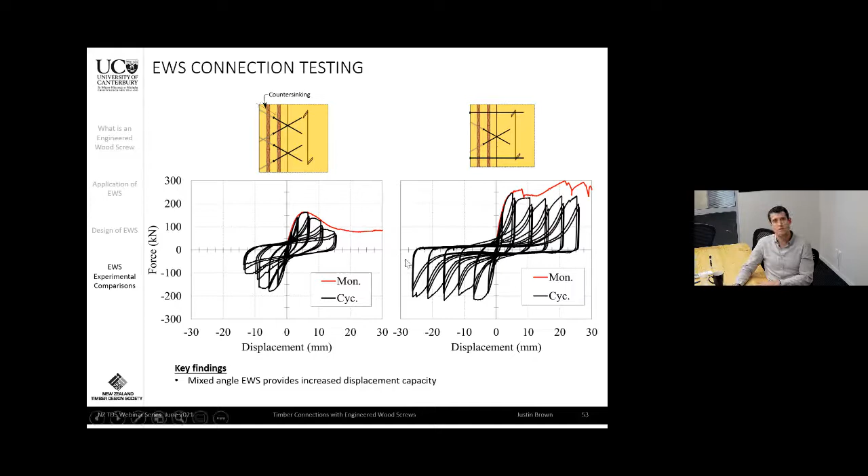Finally, I'd like to present some additional resources. Engineered wood screws is a very large topic, one of the most readily used fasteners in mass timber buildings today. There's a lot of free information available. First, the Timber Engineering Principles for Design book is a publication by Professor Blass and Sandhaas, available for free online from KIT Scientific Publishing.

There's also an annual timber meeting called the INTER meeting, with online proceedings available that can provide state-of-the-art information on timber connections. Again, the European technical approvals for each supplier are readily available and can give a lot of fantastic information. Finally, I'd like to mention that a lot of these images were actually taken from MTC Solutions Structural Screw Design Guide, an engineered wood screw specialist company in Canada. They have a guide that's also freely available, which I would recommend you look at.